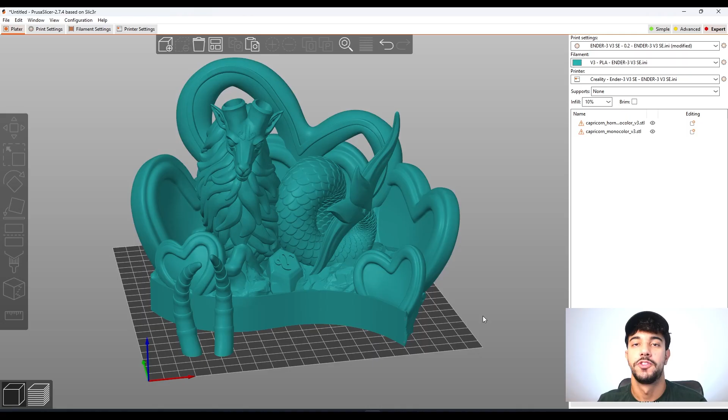In today's how to slice video, we're going to be checking out an awesome zodiac sign. So let's go to the video. This is the Capricorn zodiac sign, and this is the couple version. So this is really nice.

This is a fantastic Valentine's Day gift. In this video, we're going to be checking out the best print settings to print it.

So let's go. In layers and parameters, especially layer height, we're going to be printing this model at the standard 0.2 millimeters. So we're not going to be increasing or reducing this value. Feel free to change this value as you may like.

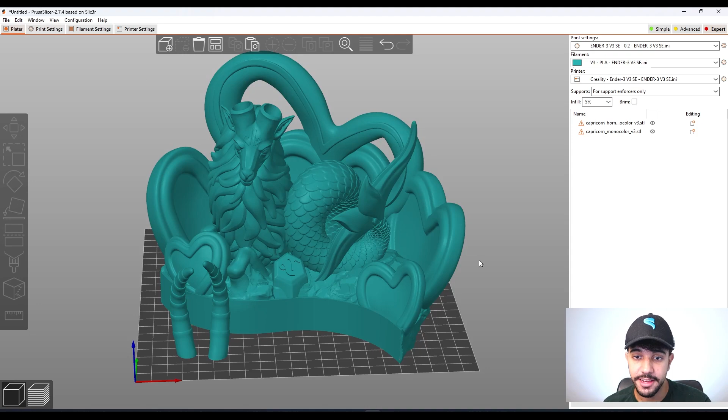Going over to perimeters, we're going to be leaving it at 3 just so we can get a really rigid model so it does not break on smaller parts such as the heart.

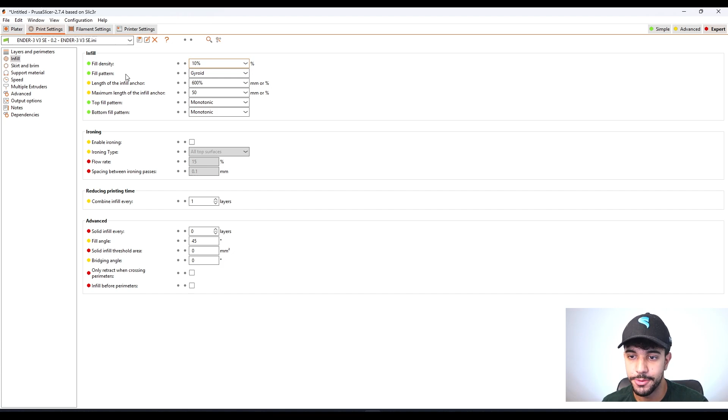Going over to infill, we're going to be increasing to 10% just to get a more dense model with the gyroid infill pattern. Going over to brim, if we take a look, this model does not need any brim because it's got a solid surface of contact to the build plate, but the horns do not.

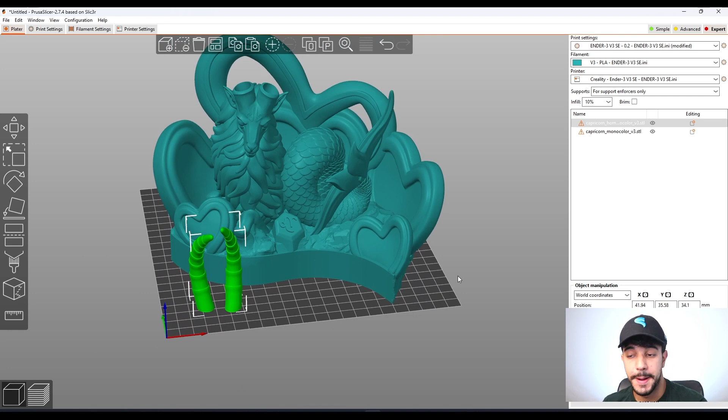So to help with bed adhesion, let's say your models keep on flipping and unsticking from the build plate, a good thing to do is add brim. Other things you can do are clean your build plate really well with some isopropyl alcohol or detergent, and make sure that your printer is really well leveled to get a really good first layer, because that's going to impact your first layer and the adhesion your model gets to the build plate.

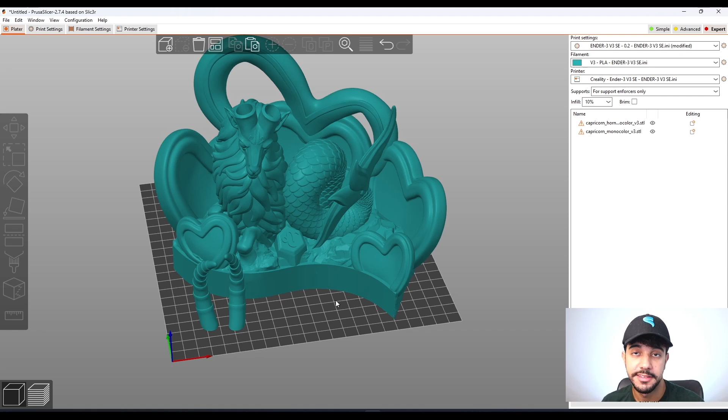And something else you can do is add some type of adhesive, like a glue stick. Feel free to do that too.

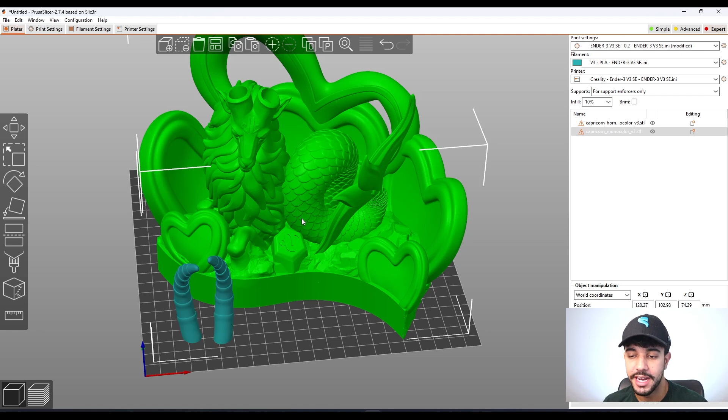In this video, I'm going to be showing you how to add a brim just to the horn to help with bed adhesion. This is optional, you do not need any brim on the horns. I'm just going to be showing you how to add some brim to this build plate, just on the horn and not on the model itself.

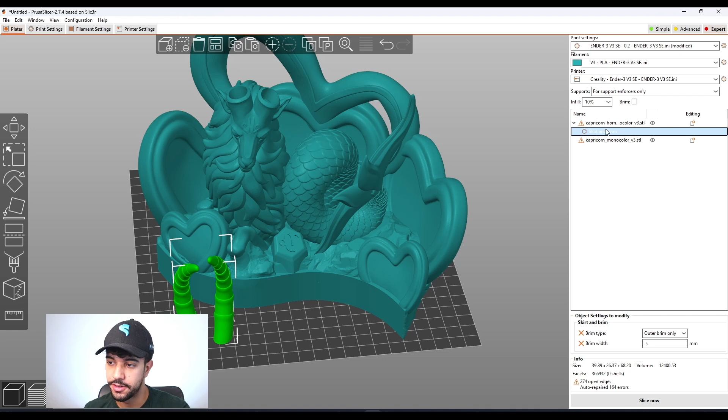To do that, you can just select the horns, right click, add settings, skirt and brim, brim type, brim width. This way you can add a 5mm brim just to the horns. So as you can see, this model right here has some skirt and brim just on this one. This one does not have any brim.

So by adding brim, it increases the surface of contact right here to the build plate, and it avoids your print unsticking or tipping over, especially on tall parts that don't have a really big base.

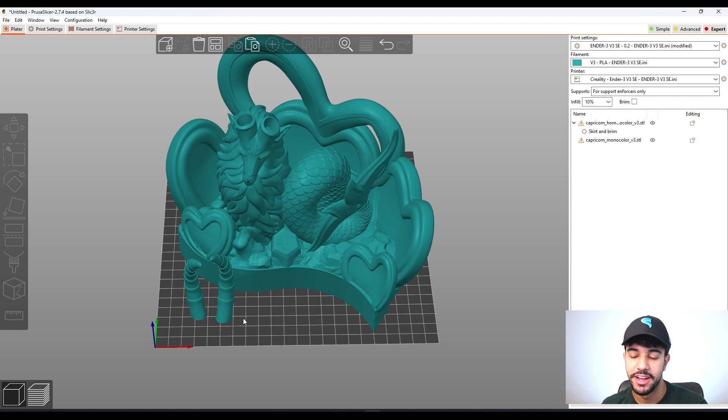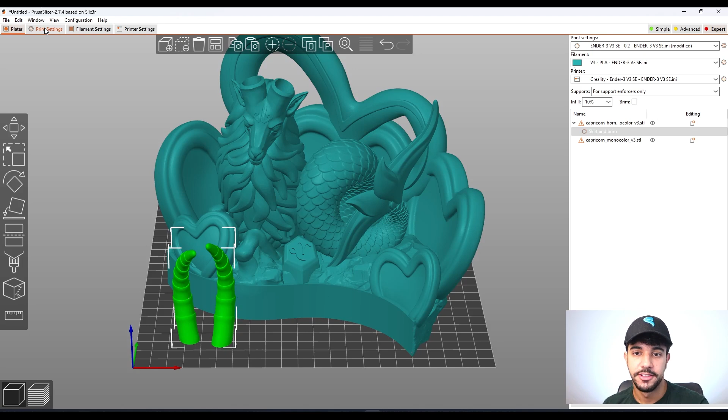So this is optional, you do not need any brim. As I said before, there are a lot of tips to help with bed adhesion without having to add any brim. So let's go back — we do not add any brim to the whole project, just to specific models. This is a really nice tip to know for future projects that you may want to print.

Going over to support material, this model is optimized for printing, so we're not going to be adding any support material. As for speed, you can be printing this model at your standard print speed.

If you're going to change any of these values, feel free to do so, print with a profile that you may like, but if you're going to change, always go to lower values. Never try to print faster, because by printing slower you're going to have a good quality print, good cooling, and the chances of your print failing are lower. So it's better to print one time really slow than trying to print fast and failing multiple times, let's say 3 times. It's going to take too much time to fail, so it's better to print slower one time and guarantee a good quality print.

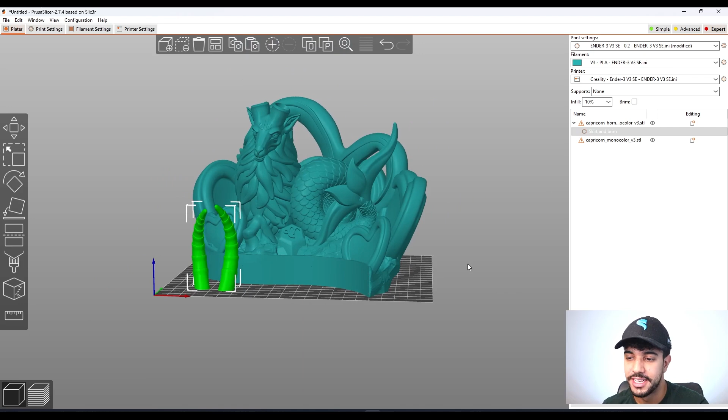So feel free to change this value, it's going to depend and vary between printers. For the Ender 3 V3 SE, it's going to be different than a BambuLab A1, let's say. So feel free to change these values as you may like. Right here on small perimeters, by reducing it to, let's say, 50mm, I'm just going to show you what's going to change. On small perimeters it's going to reduce the speed while printing them. This is quite nice to help with overhangs and bridges.

So now we are ready to slice.

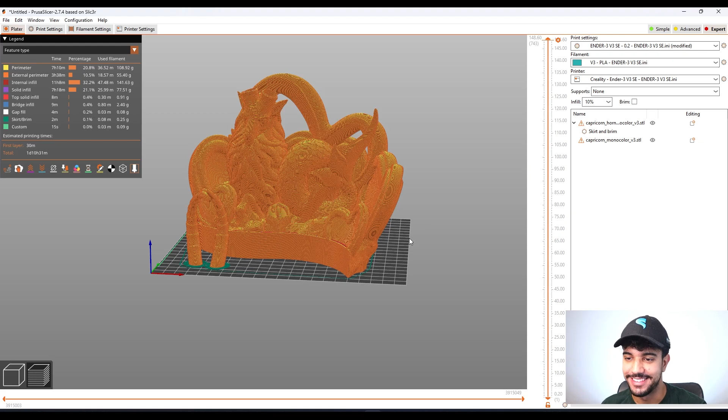So as you can see, we have sliced and it looks quite nice. Right here on the horns, we have some custom brims, just on the horns itself, not the model. So all of the layers are being printed quite nicely, as you can see. This is a really nice model and a really nice gift.

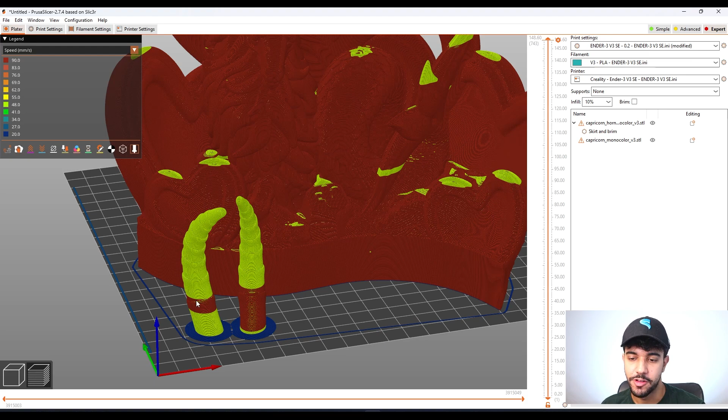If you go over to speed, you'll see that it reduces the speed while printing some small perimeters. This is fantastic to help with the cooling and to guarantee a good quality print, and make sure that on small parts like this one that do not need any brim, this is optional, but it's going to help by printing slower. It's going to avoid it tipping over while it's printing.

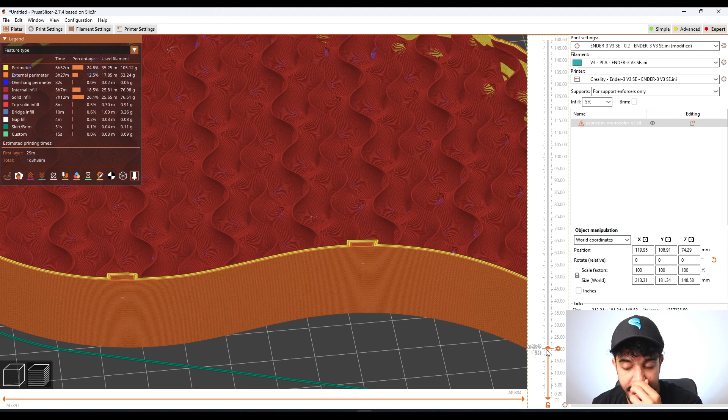So right here, as we have sliced, if we go down the layers, this is the exact 102 layers. If we go over, as you can see, this is a gap. This is where you can insert your magnet. So we have to do a pause to insert the magnet. It's going to print until here, it's going to stop. We've got to make sure it stops so you can insert the magnet. Then it's going to close up with the magnet inside the model.

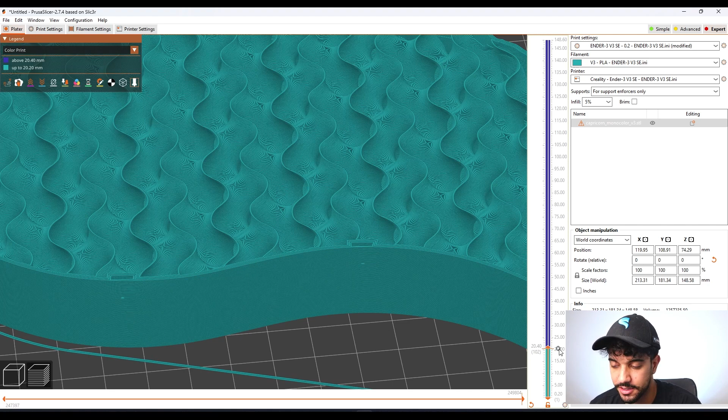To do that, we just find the last layer, which is this one, and select right here. This is a pause - it's actually a color change on Prusa, but on Bambu Slicer it is a pause. It's the same thing, so you just click right here and slice again. As you can see, it's going to change the color on our model. This color change indicates where it's going to stop so we can insert our magnet. So the model is ready to print.